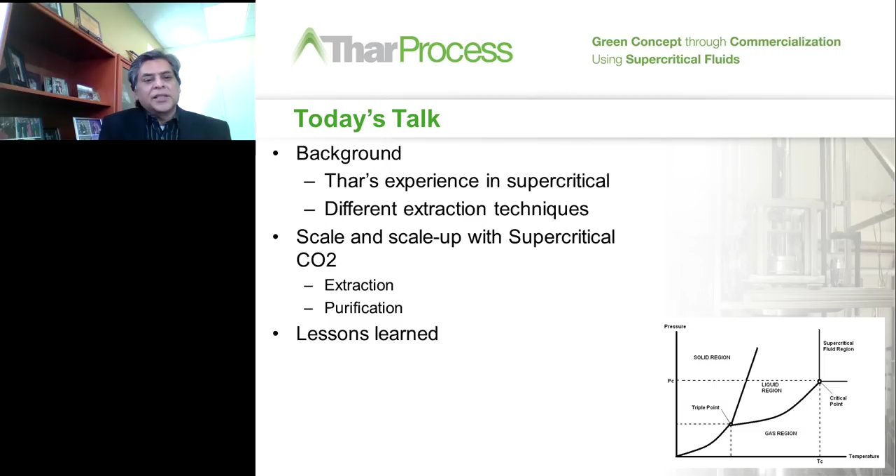Now, at the very end, I'll summarize with all the lessons that we have learned today. So to give you the history of supercritical here, in 1982, we started a company called Suprex. We were the first supercritical company in the whole world. So you can see the background, we have been doing this for the last 35 years.

In Suprex, we developed instrumentation specifically focused on extraction and chromatography. We launched the first capillary SFC in the world, and ultimately the company was sold to ISCO in 1990. I started Thar in 1990.

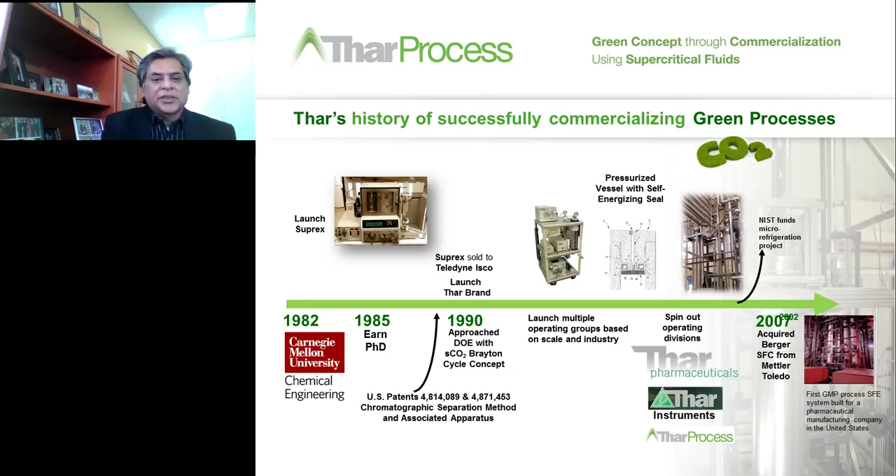In 1990, we started working on various equipment for supercritical, but not the analytical side. We made pilot plant and production scale equipment. Onwards, we went on to spin out a number of divisions from Thar, and we started building large-scale systems. We have built over 20 production scale systems, 500-liter, 1,000-liter systems, in the last 10 years.

Between 2007 and 2017, we have done a number of different things. We built a prep scale SFC, onwards to build the largest DAC column SFC in the world. We built a countercurrent column going up to 30 feet long, where you can do separations. Instead of using a chromatographic separation, we can use a countercurrent separation.

Then in 2011, we built a large facility at the back of our building that we are located today. It is a 25,000 GMP facility where we extract astaxanthin, which is an antioxidant from an algae called Haematococcus. And late last year, we doubled that capacity. So right now, we are one of the largest, if not the largest, algae producing company in the world, extracting algae using supercritical fluids.

The extraction pressure is fairly large, we're talking about 15,000 pounds of pressure. So it's one of the highest extraction systems in the world.

Onwards, we have moved into also making chromatographic separation equipment, which is HPLC and SFC. We do both depending on the sample. And we have built a 600 mm, which is a 24-inch ID column, 3 of them for a pharmaceutical company overseas. So we have a strong background in both extraction and chromatographic separations.

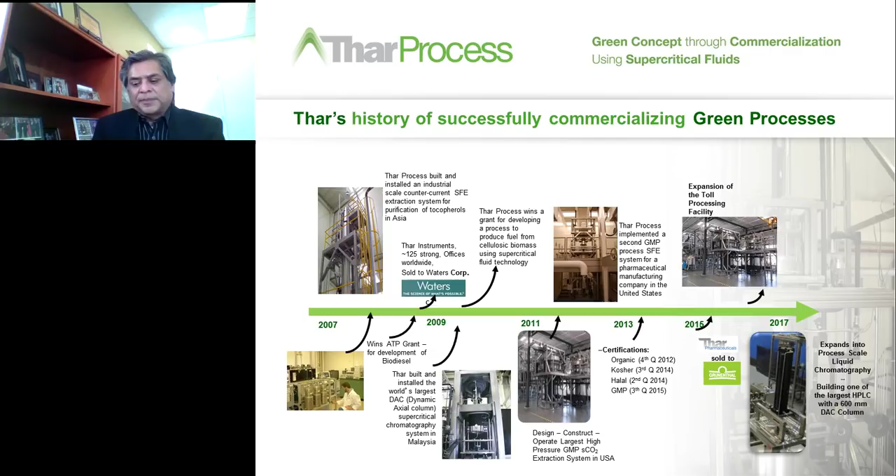The mission of Thar Process is to be a global leader in supercritical fluid technology and equipment by providing solutions involving chemistry, design, process development, and optimization. We take our customers from concept through commercialization.

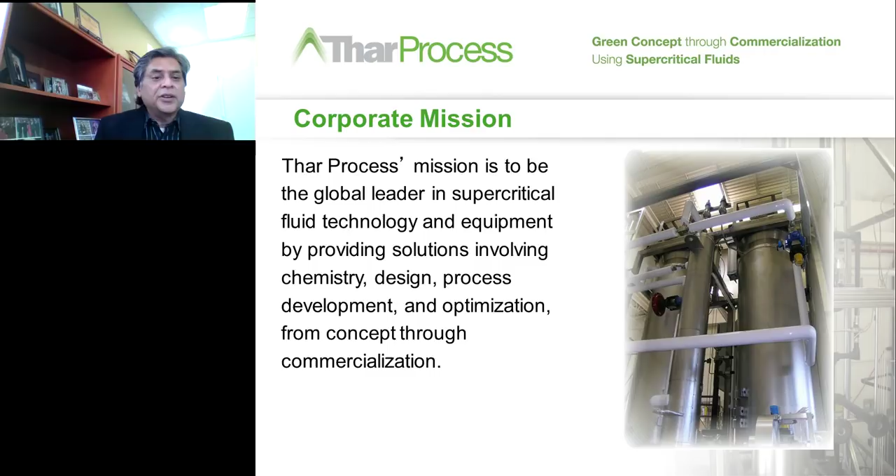Thar's competitive advantage in this supercritical area is that we are the most experienced supercritical-only company. We have been doing this for the last 35 years. We didn't start this a few years ago when the medical marijuana or hemp extraction market came into force. We have been doing supercritical long before people thought green technology was fashionable.

From a design point of view, we bring all the different process and equipment technologies together. We manufacture our own equipment, so we put together optimized solutions based on the initial feasibility studies all the way through production. All systems and major components are designed, developed, assembled, and warranted by Thar Process. And this is all done out of Pittsburgh, Pennsylvania.

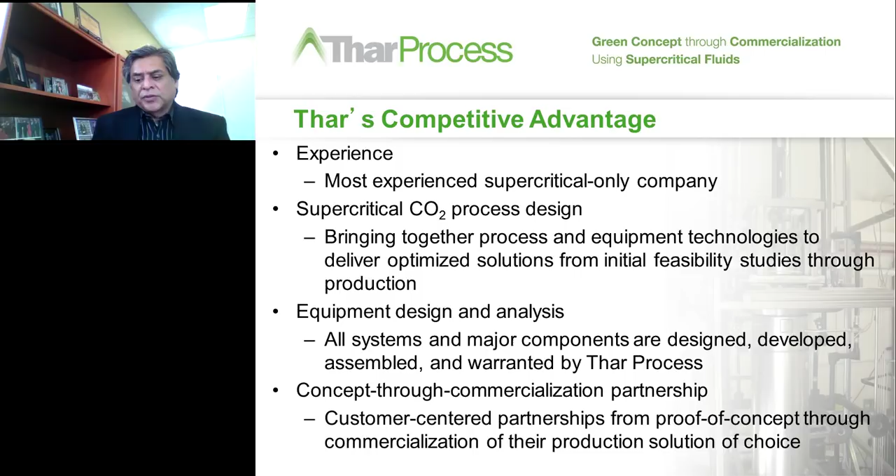Lastly, we are customer-centered partnerships from proof of concept through commercialization for their production solution of choice. So we are a very customer-friendly company.

Examples of work that can be done with supercritical include polymer purification, removing solvents from synthetic DNA, astaxanthin from algae, de-oiling lecithins, recovery of residual specialty oils, extraction of spices, flavors, fragrances, and any active ingredient from herbs. In short, if the word oil is used, we can probably extract it from the natural product.

Besides extraction, supercritical can be used for reactions, impregnations, and coatings. So there's a variety of applications you can use it for. If you're trying to make specialty products using these cannabinoids, you can use the impregnation technology to do it for any kind of applications you might have.

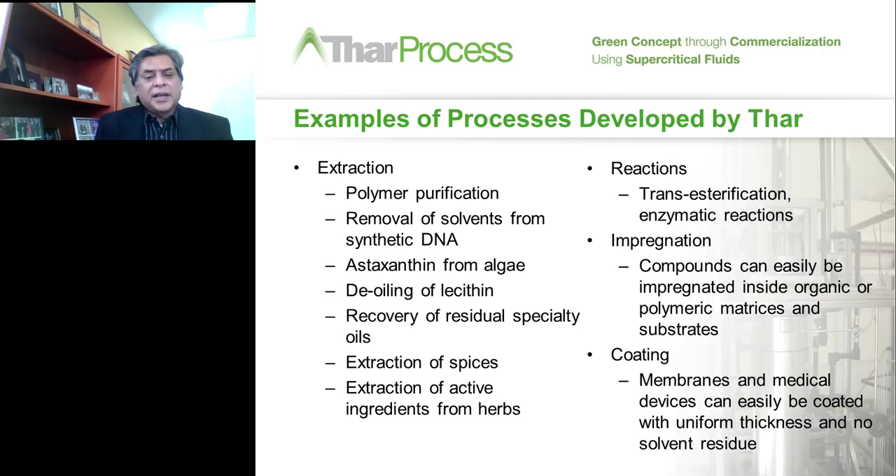What I'm going to start off today is talk about different extraction technologies. There are really five of them out there.

You can do ice water extraction, one of the oldest techniques, where you take your plant material, grind it up, put it in ice water, and since THC, CBD, and all the cannabinoids are heavier, they settle down on the bottom. It's a very simple process, but the overall extraction efficiency is low.

You can use hydrocarbon solvents like propane, butane, hexane. These are all non-polar solvents, very similar to supercritical CO2, but the disadvantage is they are highly explosive, so you have to have explosion-proof requirements, and there are a lot of regulatory issues on how much of these solvents you can have at your building, plus the constant worry of explosion. You have to be a little careful about this.

The other technique is RSO, which is similar to the hydrocarbons, but instead of using propane, butane, and hexane, you're using naphtha or isopropyl alcohol. The process is still very similar.

The other extraction solvent becoming popular these days is ethanol. Ethanol is significantly more polar than CO2, so the selectivity of compounds is very different. Ethanol is a very good solvent because it's physiologically compatible, but again, from a regulatory point of view, there are restrictions on how much you can use. So if you're trying to scale this, it becomes a regulatory nightmare to handle ethanol at scale.

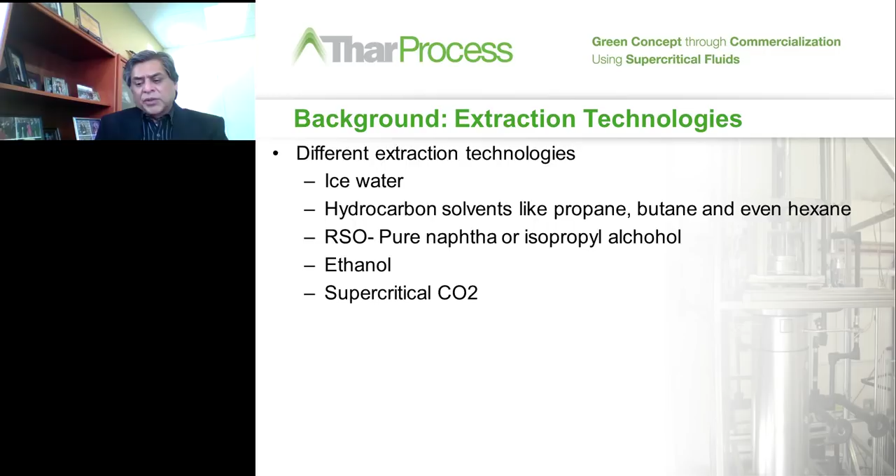The last one, of course, that we are talking about today is supercritical CO2. And we believe supercritical CO2 is a great solvent. The question is why? First, it has zero global warming potential. It has zero ozone depletion potential. It's physiologically compatible, inexpensive, and available everywhere.

We are talking about $150 a ton, which is really inexpensive. And most importantly, it does not need any explosion-proof requirements, so you can almost put it up anywhere.

The other advantage of supercritical is that by varying the temperature and pressure, you can extract different things. By running a low temperature extraction, you can get high selectivity. But the negative of low temperature extraction is that you have a high solvent-to-feed ratio, so you have to run the CO2 by a factor of about 10 to get the same overall extraction efficiency.

On the other hand, you can increase the temperature and run high temperature and high pressure, getting very high extraction efficiency, but the selectivity is low, so you end up extracting things like waxes, which you have to remove further. But overall, the solvent-to-feed ratio is low, which means you get high productivity. So there are advantages and disadvantages to any of these approaches.

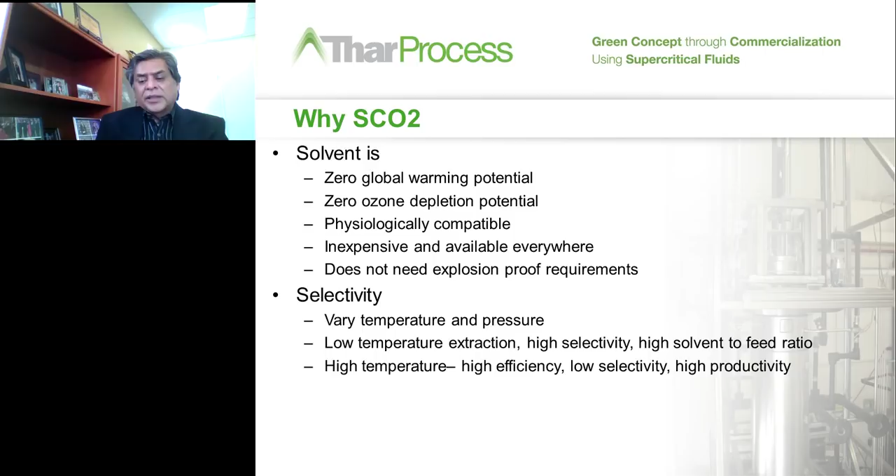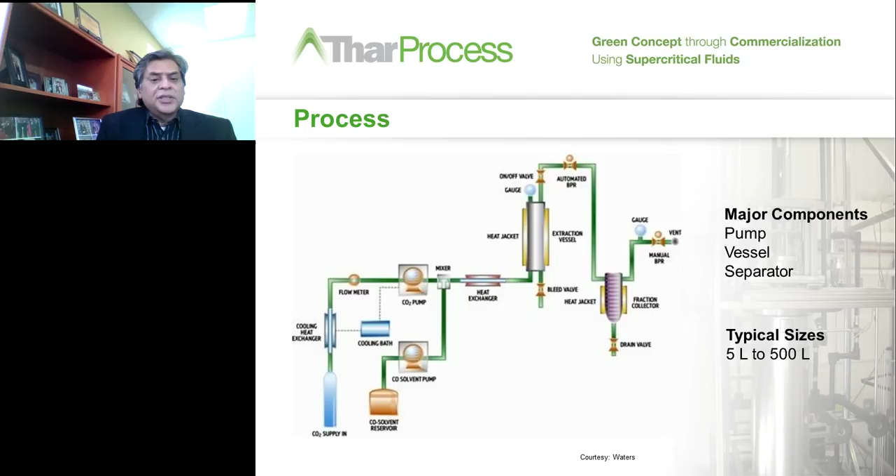Now, when you come to sizing, the important question is how do you determine what size you need when you scale up? The first and foremost question is, what is the solvent to feed ratio?

You do trials on a lab scale 5-liter system and then determine the solvent to feed ratio. This is important because, as I mentioned earlier, temperature and pressure play a major role in the extraction. If you're doing low temperatures, you may need a solvent to feed ratio of even 120. If you do high pressure and high temperature, the solvent to feed ratio is 10. So solvent to feed ratio controls your sizing. That's the first thing you need to know.

Once you know the solvent to feed ratio, you define what capacity you're going for. Is it 10 kilos a day, 100 kilos a day, a ton a day? Based on the capacity and the solvent to feed ratio, you get to a number which is the total amount of CO2 you need on a daily basis. Then, whether you're doing this in an 8-hour time frame or a 24-hour time frame, you can calculate the pump flow rate.

So we start with the basic thing here: the pump flow rate defines your capacity. It is not the vessel size, which is what everybody thinks. It is actually the pump flow rate. If you have a small pump and you put in a vessel, even if you double the size of the vessel, it doesn't mean your capacity has gone up, because the capacity is controlled by the flow rate of the pump. That is the most critical thing from a scale-up point of view: defining the pump flow rate, which is a function of the solvent to feed ratio and the capacity you need.

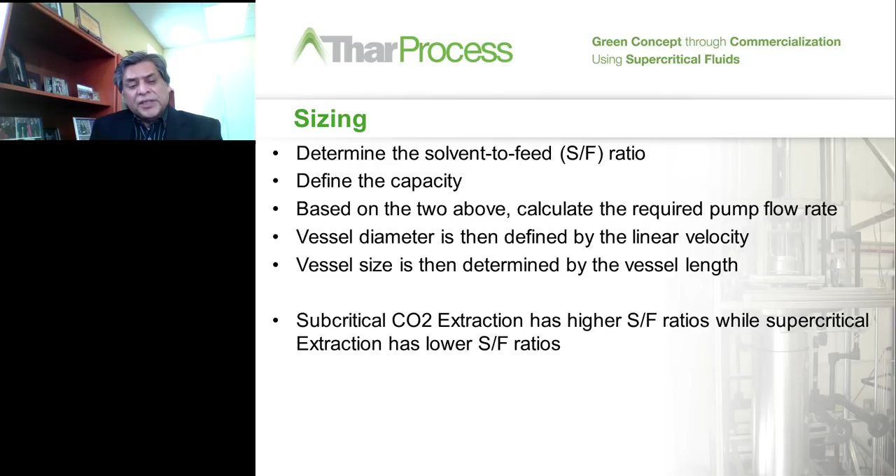Lastly, subcritical CO2 extraction, which has high solvent to feed ratios, will force you to use a vessel with a very large diameter, which obviously increases the cost because of the pressure. While supercritical extraction, which is high pressure, high temperature, has much lower solvent to feed ratios. That's how you come up with sizing for a large scale, or a scale-up issue.

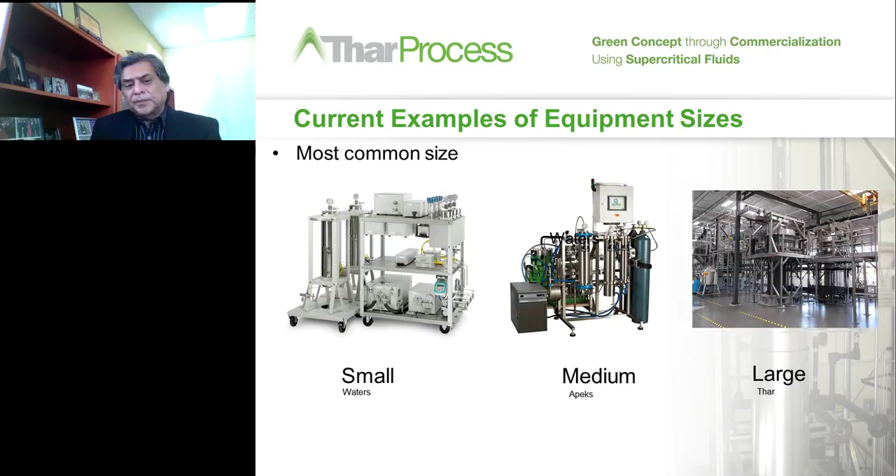So again, talking about scale-up issues, how do you calculate cost? Here's from our experience: capital cost is y power x. In other words, if you were to double the size, so y is a factor of 2, and we power it to 0.68, then the capital cost will go up by 1.6. So it's not linear, it's not logarithmic. The power is typically 0.68.

Every time you double the size, you can assume capital cost goes up by a factor of 1.6. Typically, utility cost is a function of flow rate, which largely remains the same on a per pound basis when you process it. So you don't get much reduction by scaling up, maybe about 3% for every doubling of the flow rate. So you don't get a substantial reduction on utility costing.

And finally you come to labor. The unfortunate part of labor is it remains the same whether you use a 5-liter system, a 100-liter system, or a 1,000-liter system. So labor becomes the largest portion of your cost. As you scale up, labor becomes a smaller portion of the overall cost. So it's very critical, if you want to drive the overall cost down, to scale up to as large a scale as possible.

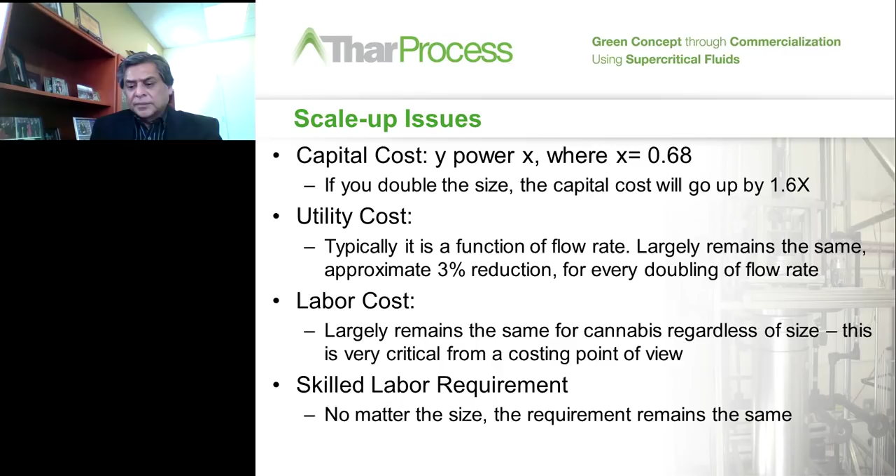The other way to design your system is to have different configurations. The basic system is one vessel and one pump. That's simple, straightforward - you have a vessel, a pump, and a separator, and you're done. That's what most people sell.

Now you can go from here and ask, how do I increase my capacity? You can have 2 vessels and 1 pump, and while the first one is running, you can load the second vessel, get it ready, and get it moving. That will give you a 30% increase in capacity. That's a typical number - sometimes higher, sometimes lower. It all depends on your total extraction time. Shorter extraction time, greater effect it has; longer extraction time, less effect. So you can go from a 1-vessel to a 2-vessel system, adding just the cost of a vessel and a couple valves, and that immediately increases your capacity by about 30%.

The next thing you can do is a series configuration. This is very interesting - you have 3 vessels, 2 of them connected in series, and only 1 pump. The same pump used in the first 2 configurations, you can use in this one, and the CO2 will go from the first vessel to the second vessel. Because you have 2 vessels in series, you have the highest extraction efficiency. In other words, if the first and second vessel each gave you 80% extraction efficiency under the same conditions, in series you'll definitely get more than 80% - it could be 85, it could be 90. It's a function of the application, but it's the highest you can get.

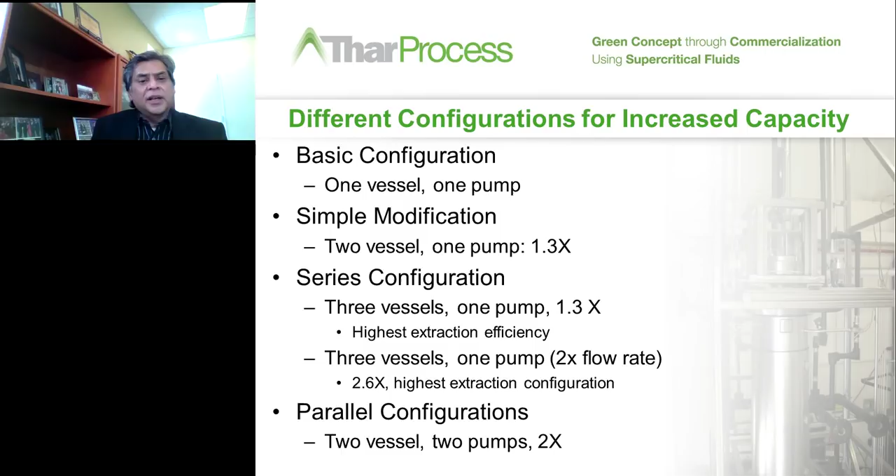The most expensive configuration is the 3 vessel, 1 pump with 2x flow rate. That will be the most expensive capital configuration, but it also has the highest capacity. So we use these different configurations to define what our scale-up and configurations are to get to where we want to get to.

The practicality is we believe there's going to be market consolidation. So far we've had a lot of people doing mom and pop operations with small systems. As the market grows, people with scale are going to win, because labor is one of the largest portions of overall costing. Whether you have a 5-liter, 100-liter, or 500-liter system, you need the same amount of labor. So if you want to drive overall costing down, you reduce labor as a percentage, and the only way to do that is by going to scale.

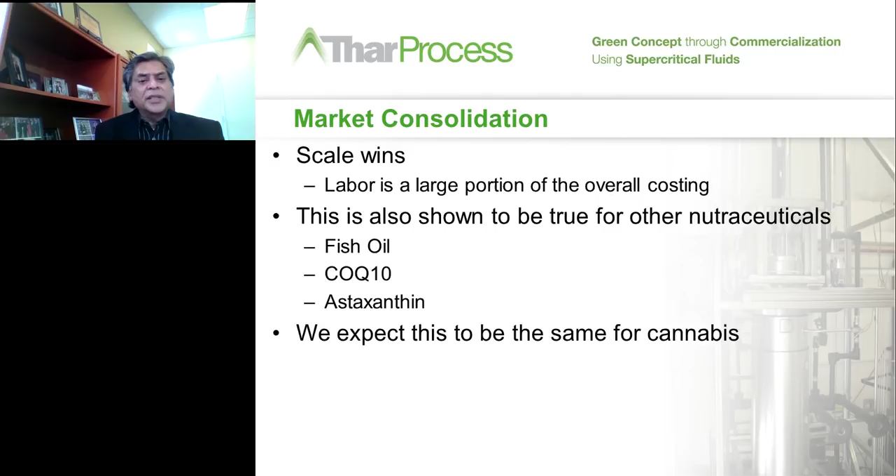Now this has been shown to be true for other nutraceuticals. Here are 3 examples: fish oil, CoQ10, and astaxanthin. In all of these, scale wins, and people end up moving from small-scale systems to large-scale systems. We expect this to be the same even for the cannabis industry.

Now the next question becomes: when you get to scale, are we better off subcontracting, or are we better off doing it ourselves? That's a function of scale again. So the question, if I were to repeat it, is: should everyone own their SFE, or will it be less expensive to send it out to large-scale processors?

In the whole food industry, especially cannabis, right now we do not have major regulations because cannabis is not looked well upon by the FDA. But as soon as the regulations change, you can expect significant regulations coming down to follow CGMP requirements for the extraction. And once you say you have CGMP requirements for your product, you have a ton of quality control procedures that you need to follow.

Typically you may have 3 to 5 people dedicated to following these CGMP requirements. As a percentage, if you have small operations, they become very, very expensive. It also requires you to have in-house expertise for all the different things, whether you need a mechanical engineer to maintain the equipment, a chemical engineer to run the process, or quality control and analytical people, especially if you want certifications—CGMP certification, kosher, halal, organic certification.

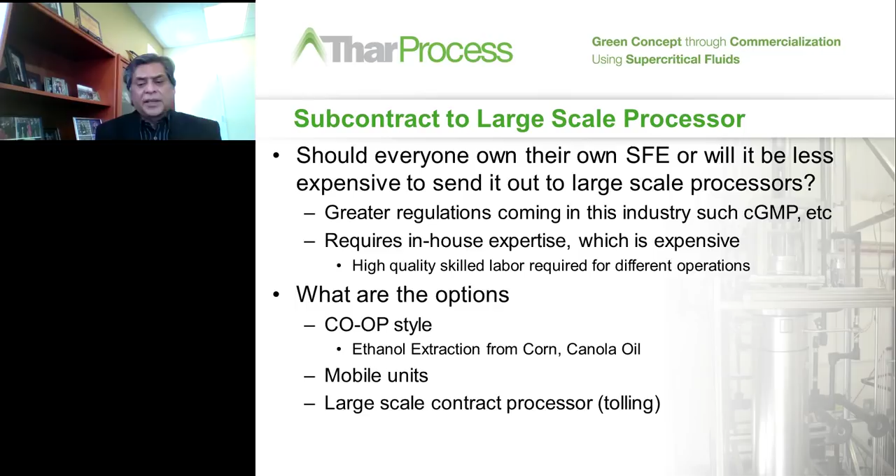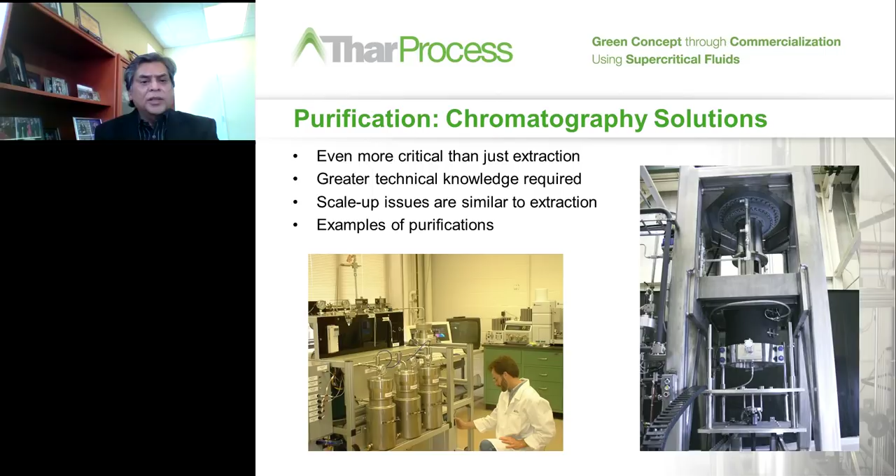If you're looking to do multiple kilograms per day, the first question is you need a large diameter column, and these columns are available all the way from 8 inches to 24 inches. The pressure ratings on these columns have to be in the range of 175 to 300 bar. The flow rates of CO2 and the co-solvent, typically ethanol in this case, range from as little as 5 kilos a minute to as much as 15 kilos a minute. So those are the typical specifications for multiple kilograms per day of chromatographic product.

The scale-up parameters are very straightforward. If you double the diameter of the column, the total amount you can process is typically 4 times, and the productivity is directly proportional to flow rate.

Selectivity, which is very critical for chromatographic separation, is a function of particle size. Smaller particles give greater selectivity, but the cost of the chromatographic particles goes up, so you need to do an optimization. Typically we suggest something in the 10 to 15 micron range as the ideal particle size from a cost-performance basis.

Speed, capacity, and selectivity are very closely interrelated in chromatographic systems. You can get high speed, high capacity, and high selectivity, but if you want all three, the cost quadruples. So you have to optimize this to get the solutions you're looking for.

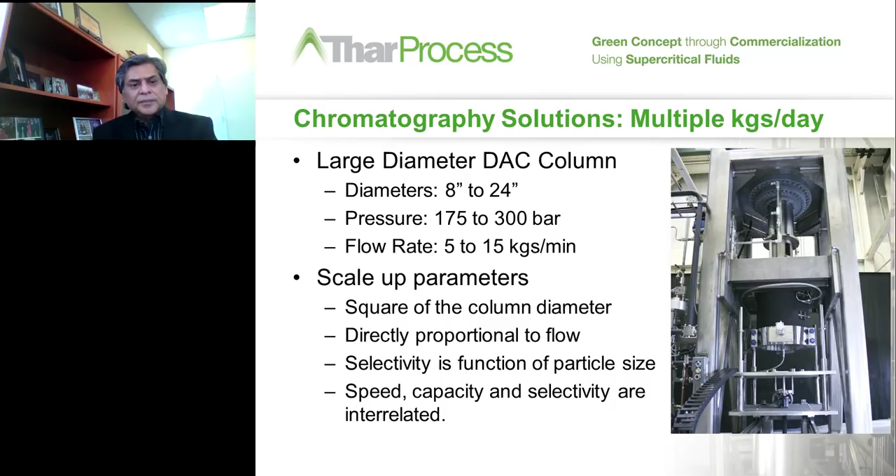Lastly, I have a couple slides to conclude my talk and discuss what lessons we've learned today. The first is sizing is a function of solvent to feed ratio, the capacity of the pump, the capacity of the system you're looking for, the pump flow rate, the vessel linear velocity, and all of that. These are all interrelated, and you start with the solvent to feed ratio and capacity to get the rest of the parameters.

Subcritical extraction is very selective. It's a great way to do it, but it has a very high solvent to feed ratio and a lower efficiency. It depends on what kind of product you're looking for. If you're looking for a winterized oil, subcritical extraction is a good way to go without going through ethanol extraction at the back end.

Supercritical extraction has a much lower solvent to feed ratio, typically a factor of 5 to 10 less than subcritical extraction. It gives you higher extraction efficiencies because you're running at higher temperatures and pressure, but it extracts waxes and other unwanted products. So once you extract this, you have to do a conventional winterization using ethanol, and that costs time and money. So it's a trade-off whether you want subcritical or supercritical extraction.

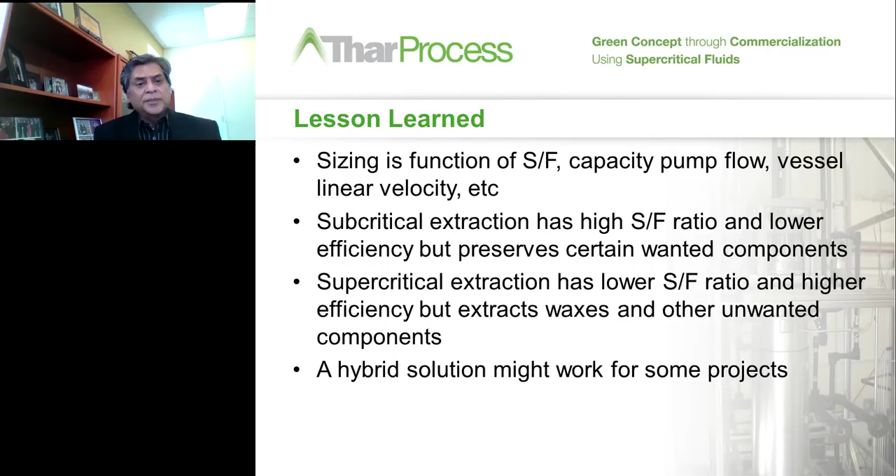Sometimes a hybrid solution might work. You may want to do a subcritical extraction to get a clean winterized oil, then go back, change the pressure to a higher pressure and temperature, and extract what's left over. Overall you get a higher efficiency and two products: one is a winterized oil directly, the other requires an ethanol extraction to produce a winterized oil. Quite a few people will take both these oils and mix them together to get a complete full spectrum oil.

To summarize, we do expect consolidation to happen. As the market grows, you'll have larger and larger players coming into play, both internally for their own needs and externally for working with other people. So large-scale extraction will be the norm as we go forward. Many groups will set up their own facilities wherever they have the technical capability and the money to do it, so they don't have to send the material out. But that doesn't work for everybody.

We'll have mobile extraction units which will come to your facility to do this high technology extraction as a service at your site, or you can go to a toll processor who will provide the same service at their facility. So you have all of these options, and you can expect every one of them to be a solution for what you're trying to do. Depending on what you'd like to get at the end of it, you can pick one or the other. Of course, if you have the money, the best is to set up your own large-scale extraction unit, because you can control everything.

You can control what you're trying to extract, the technology, and it's all internal. But that might not work for everybody. In that case, you might be better off going to an outside facility. Or the last one is, as I mentioned earlier, a group of people can join together, create a co-op, and run the co-op for all their shareholders. So all these options are available.

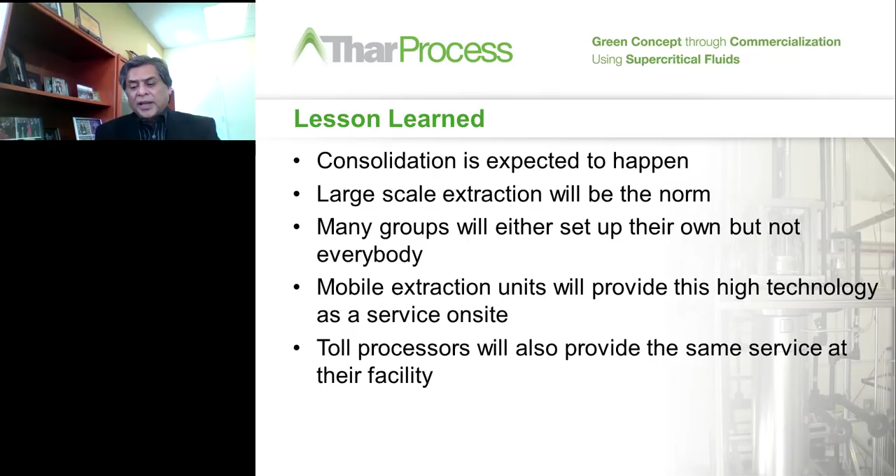And with that, I would like to conclude and say Thar Process will be happy to be an extraction and purification partner. And if you have any questions, please feel free to let me know and I'll be happy to answer. Thank you very much for listening to me today.